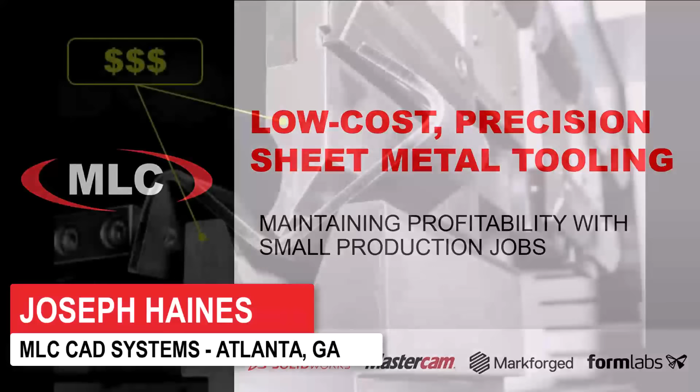In this webinar, we're going to take a look at how low production volume sheet metal bending jobs can actually be profitable. Typically, the largest upfront costs with a sheet metal gig are tooling related.

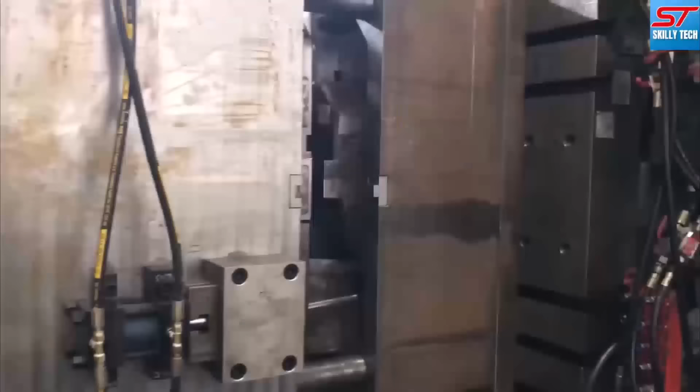I come from the automotive world where tooling costs are very prominent, particularly in metal stamping and injection molding. I bring this up because both automotive and sheet metal industries use the same solution to offset these high tooling costs: making a lot of product.

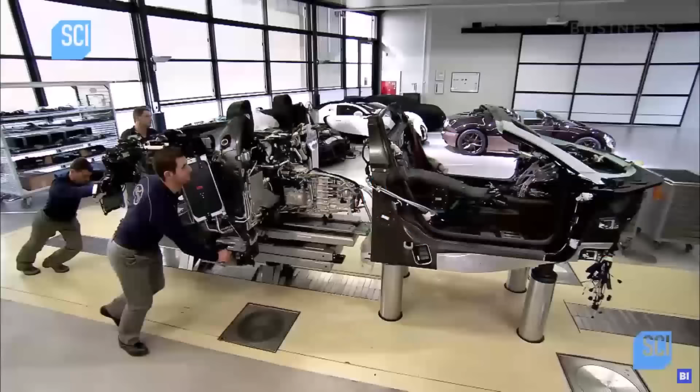That's one of the main reasons why cars like the Lexus LFA and Bugatti Veyron, each of which saw less than 500 units built, are so expensive. While these ultra-high cost performance cars have deep-pocketed buyers willing to fork over the big bucks, the same cannot be said for expensive, small, custom sheet metal orders.

With most customers not willing to pay the high prices, the fate of these jobs usually ends up the same way. But what if they didn't have to?

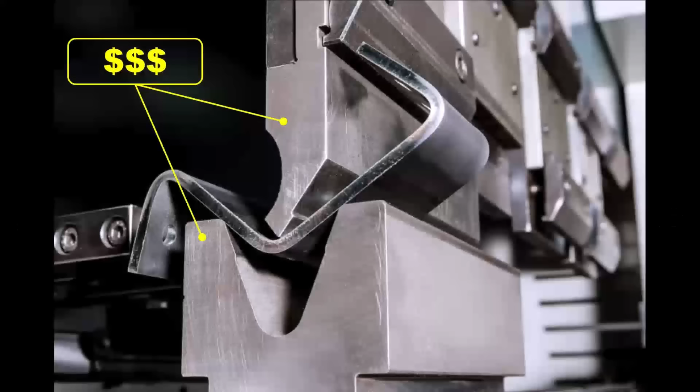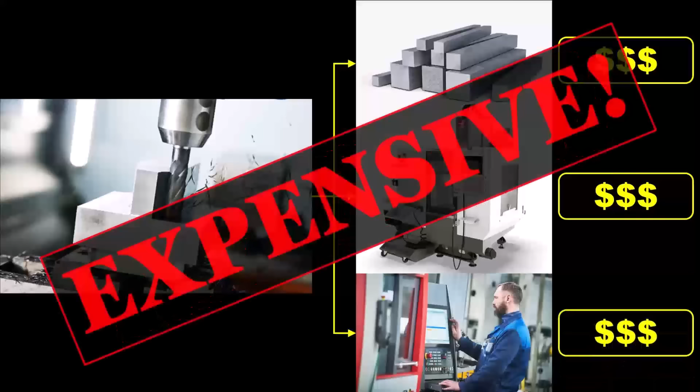Much of the high cost associated with traditionally manufactured sheet metal bending dies is just that - they were made with traditional manufacturing methods. Expensive blocks of steel that have to be milled down with expensive CNC machines operated by expensive, highly skilled machinists is, well, expensive. However, there is an alternative manufacturing method that can easily eliminate all these barriers.

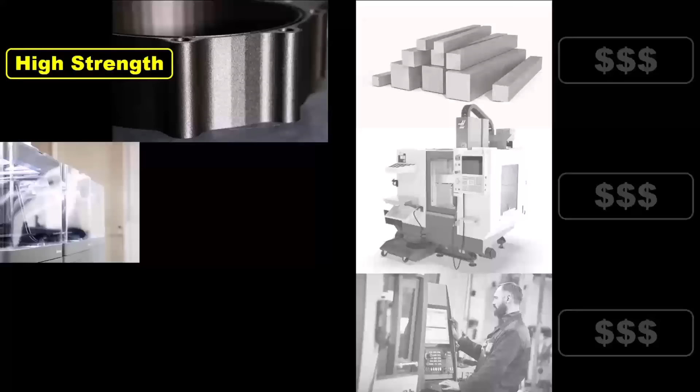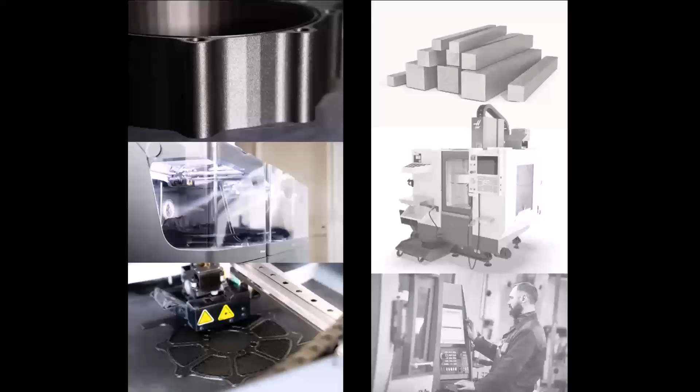It uses strong, low-cost material in a comparatively less expensive setup that is fully automated - no tending to or programming required. And to build on this list of opposites, the name of this technology happens to be an antonym of subtractive manufacturing. Of course, we are talking about additive manufacturing, or 3D printing.

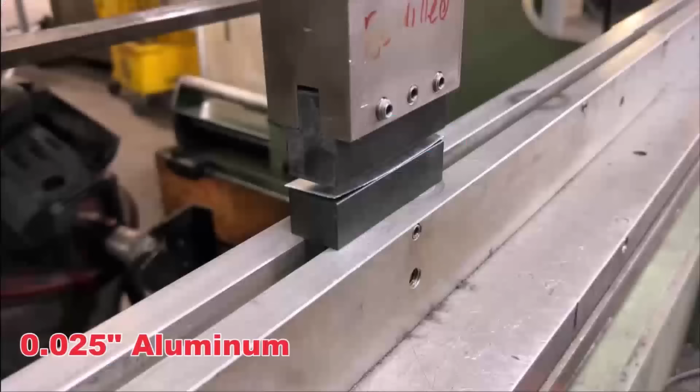That's right, you can actually 3D print sheet metal tooling. In fact, we've done it before with our sheet metal stamping dies. And here, we did it again, only this time focusing on sheet metal bending.

After speaking with Roland, our resident sheet metal expert and one of our top CAD AEs, two types of tooling were settled on: a Z-bending die and a gusset forming die.

To understand why we chose these, it's important to first understand that unlike injection molds or stamping dies, sheet metal bend dies can be used across many different jobs as long as factors like material and gauge are the same or similar. This is easy to do with simple V-block dies, but more complex bends and new or uncommon gauges require custom tooling.

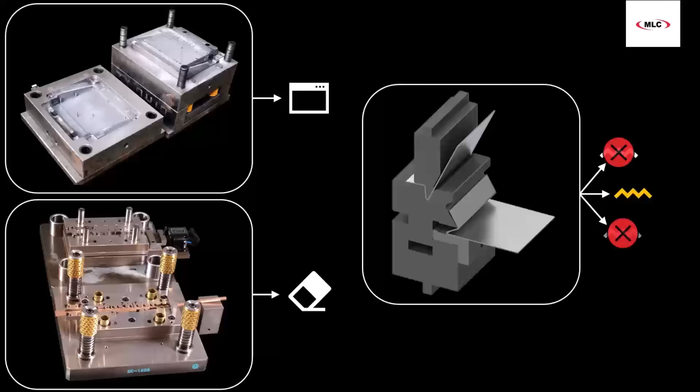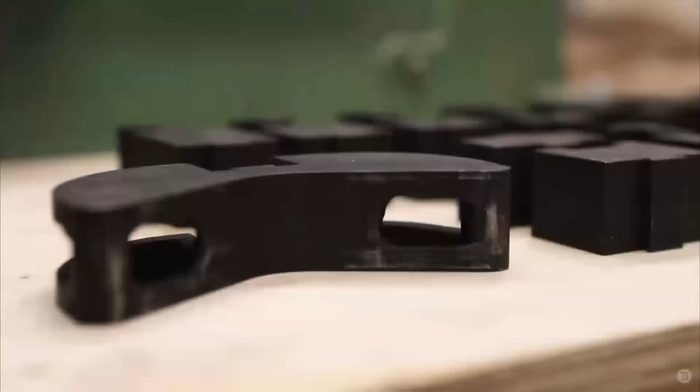When presented with a job that will require new tooling, machine shops will first determine if modifying a pre-existing tool is possible. That way, less cost is incurred by the customer and turnaround time is shorter.

So for these dies, this is just a whole bunch of quarter-inch pieces stacked up and welded together - because if you've ever shopped for this stuff before, it is extremely expensive.

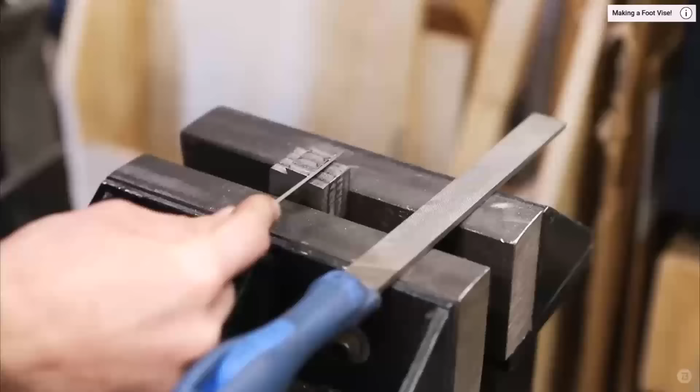However, there are limitations to modifying dies, and that leads us back to the tooling we chose. Z-bending dies have unique geometry that is specifically designed to the size of the Z-bend and gauge of sheet metal. Therefore, there's no room for modification here.

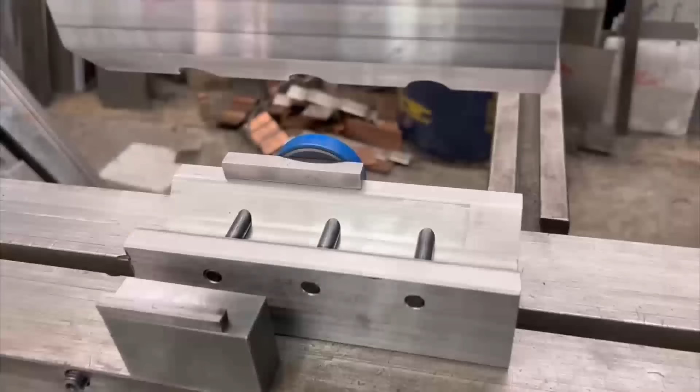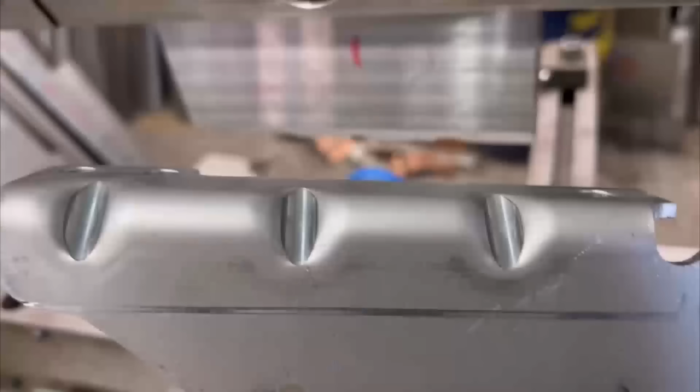Gusset forming dies, on the other hand, are a little more forgiving because they're usually a V-block with drilled-through holes for rod insertion. It's an easy modification, but it means drilling holes into a perfectly good V-block, plus you are now limited to forming gussets of one size. Not much room for modification, as it turns out.

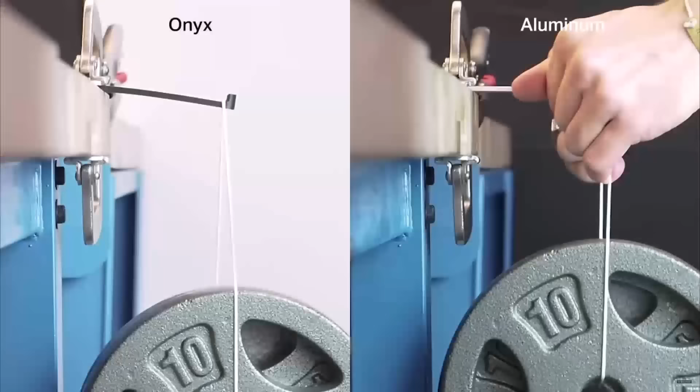But none of these limitations need to exist when you have high-strength composite 3D printing at your disposal. Thanks to Markforged, custom dies can now be made both quickly and inexpensively.

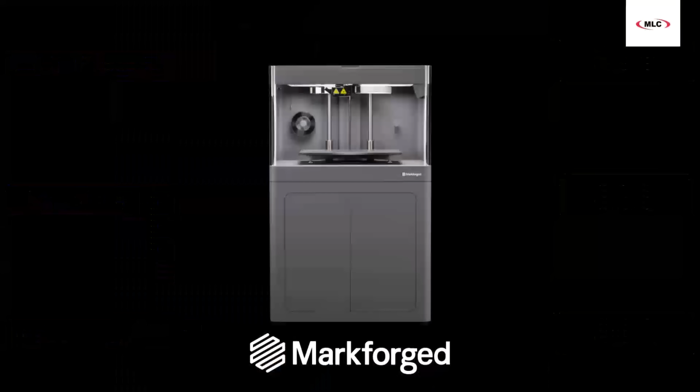Before we get to printing, our dies first had to be modeled, a job accepted by James, MLC veteran and one of our other top CAD AEs. In fact, he went ahead and just modeled up the whole 20-ton press we bought. So yeah, I'm pretty sure he's just flexing his SOLIDWORKS skills at this point.

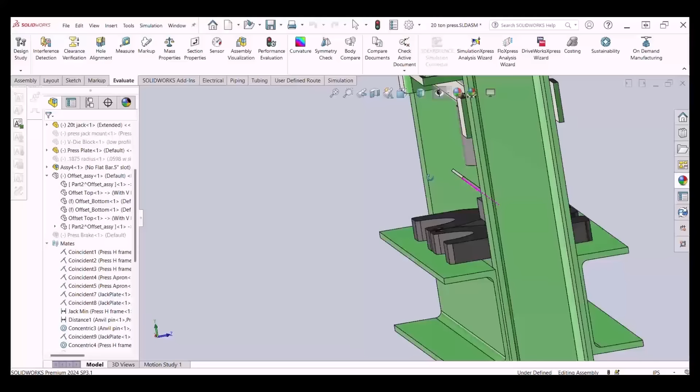But actually, it helped us get an understanding of how tall to make our dies and how to firmly secure the top punch to the post. On that second point, we pulled from a skill set that was the subject of a webinar from last year.

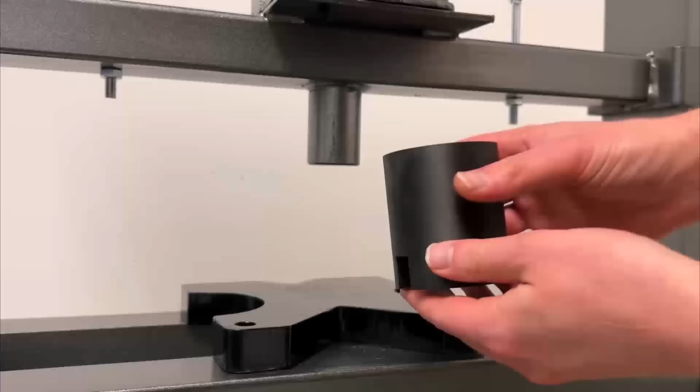3D printing's unique ability to attach anything to anything. James applied this knowledge to model a ring that can slide around the press's post and features notches that engage with the punch. He even made the notch slightly deeper than the post so that the post is the one applying pressure on the die. With this work done, James could begin modeling the dies.

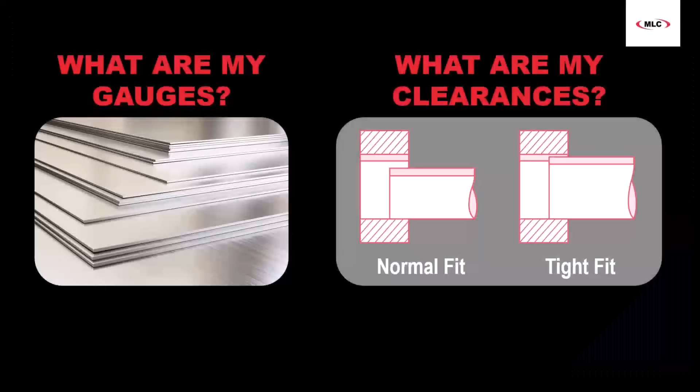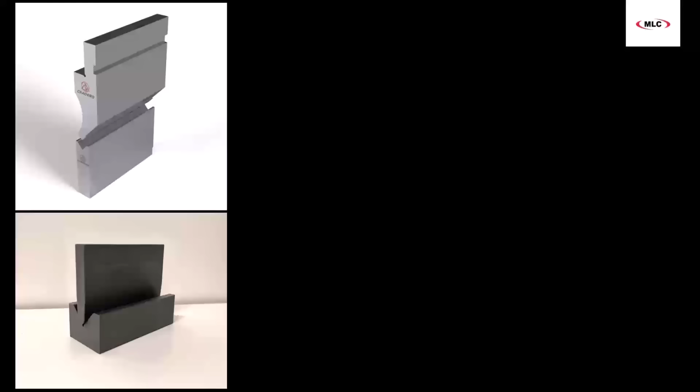The critical bits of information here are knowing the sheet metal gauge and any clearances to take into account between dies and mating components. If that sounds familiar, it's because dies designed for machining or 3D printing undergo essentially the same design process. With FDM 3D printing, clearances are typically 0.1 millimeters for tight fits and 0.2 millimeters for loose fits. As for the sheet metal, our primary gauges were 22 gauge and 16 gauge steel.

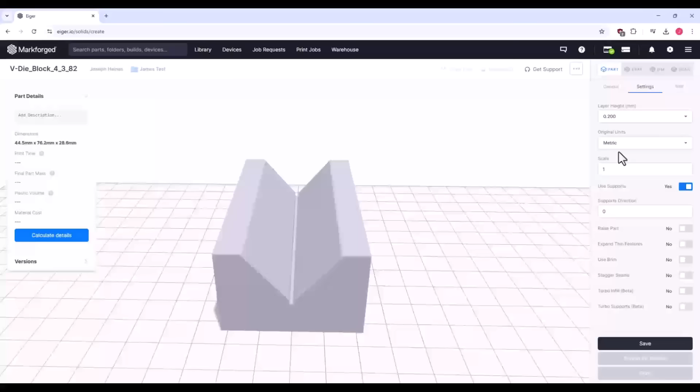Satisfied with the models, we exported the STL files for all the dies and imported them into Eiger, the slicing software for Markforged printers. Markforged printers are perfect for this application because they print with extremely strong thermoplastics capable of being reinforced with continuous fibers like carbon fiber.

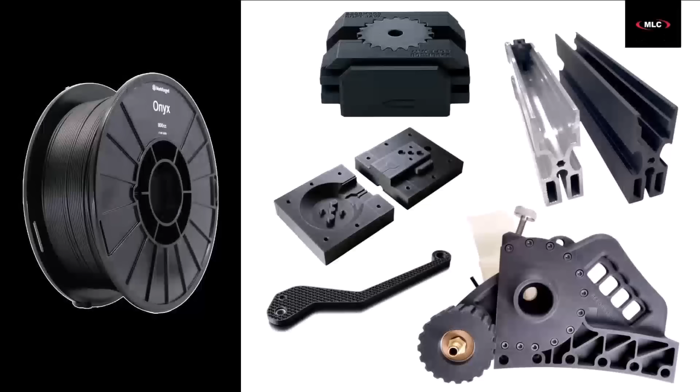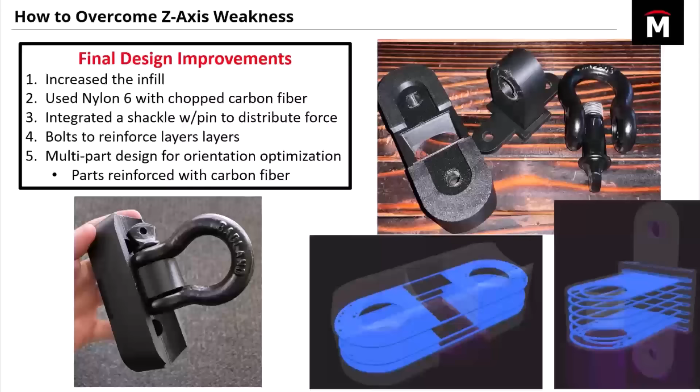Their most common material is called Onyx, a chopped carbon fiber infused nylon that is 1.4 times stiffer than ABS, and is what we used here. If you pair Onyx with continuous carbon fiber, you can actually achieve stiffness equivalent to 6061 aluminum.

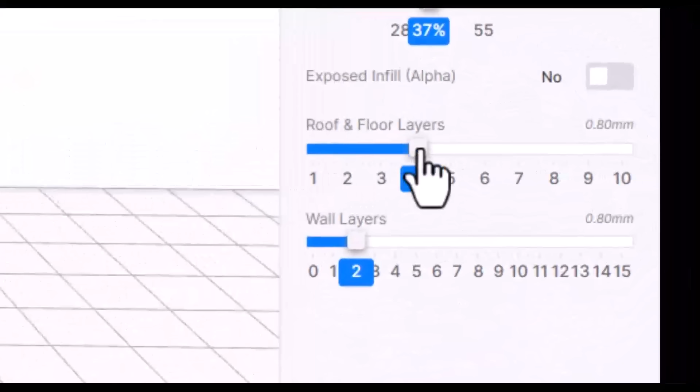It's really strong stuff. But to test the waters, we relied on just Onyx for the first die sets, boosting the strength by doubling or tripling the roof and floor layers and the wall layers. With all this set, it was now time to print.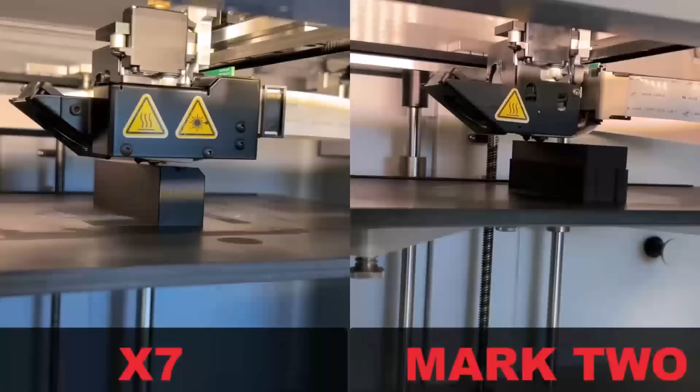Now we have two printers in our office, the Desktop Mark II and Industrial X7. We were able to crank these dies out in no time thanks to printing them on both printers. Everything was looking good on them, so all that was left for us to do now was squash some metal.

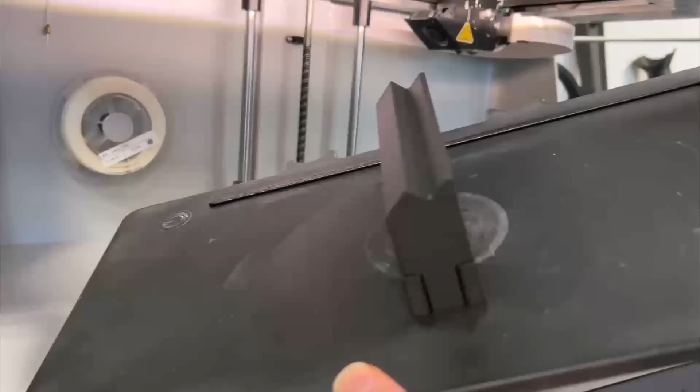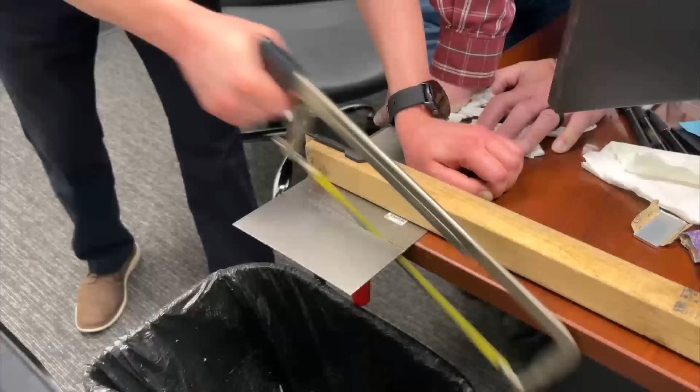Our 22 gauge and 16 gauge pieces were prepared using our tin snips, which was brilliant for the 22 gauge steel, a Dremel, which was okay but mostly just made a ton of noise and sparks, and a hacksaw, which made me pray for the sweet release of death.

Hallelujah! The 22 gauge piece was thrown into the pinless gusset former and bent with the help of our coworker's 6-year-old son. Not trying to one-up anyone here, but if we can bend sheet metal with custom-made 3D printed dies and some child labor, then you can too. Well, minus the child labor part.

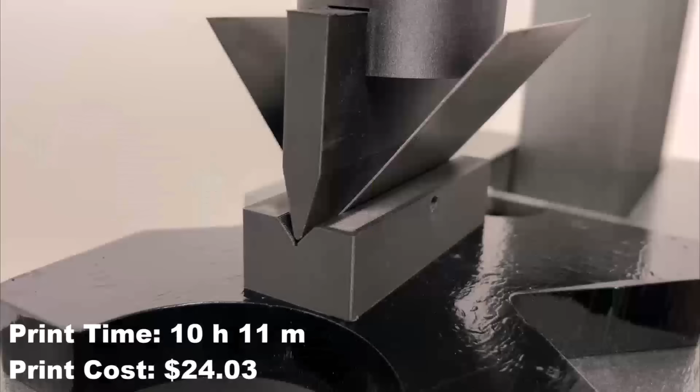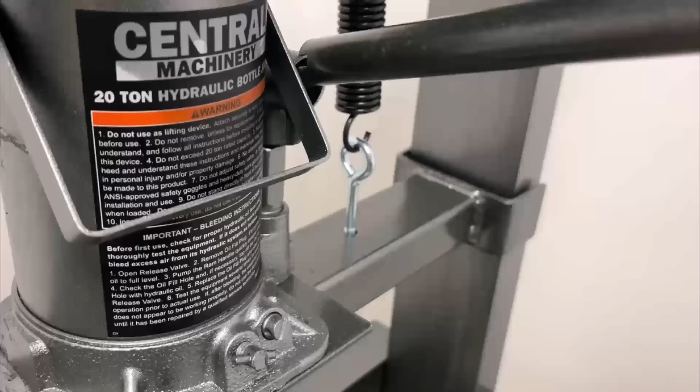Oh, and to retract the bottle jack, you usually use the cranking pole to turn this relief valve, but this is a bit awkward, so James actually modeled and 3D printed this handle to make our lives easier. I'm telling you, 3D printing has so many uses.

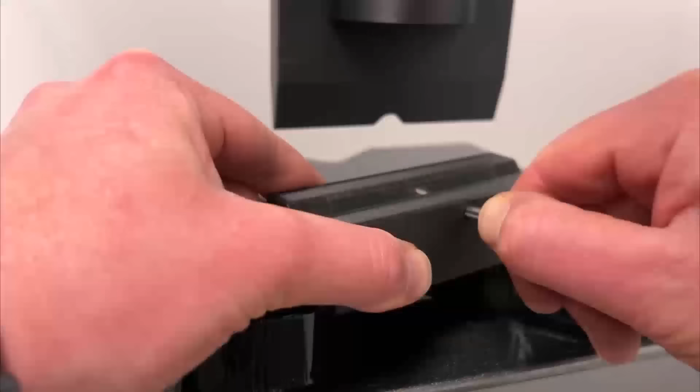Back to the bending, we inserted a 3/16-inch cotter pin and laid down our 16 gauge plate, which is the gauge this die was designed for. It's a little awkward lining the two die halves together and keeping them lined up, so it takes a bit of finesse and patience. But the bending worked well and the gusset looks really clean.

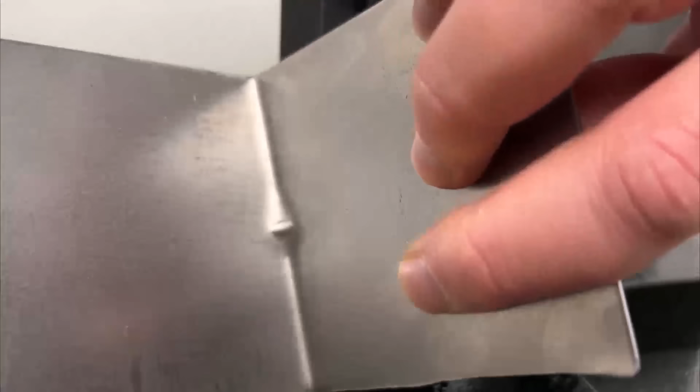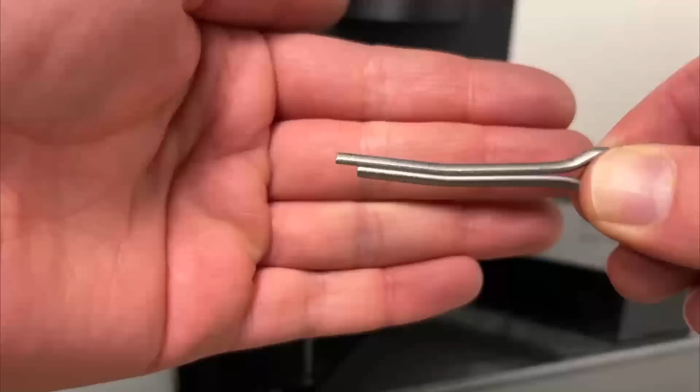And speaking of clean, the bend lines appear parallel when placed against the 90-degree section of I-beam on the press, so that was good to see. Only downside was our cotter pin didn't hold up so well, but you can see here the die wasn't even scratched. We then loaded up some more 22 gauge stock and attached a digital angle reader to the plate.

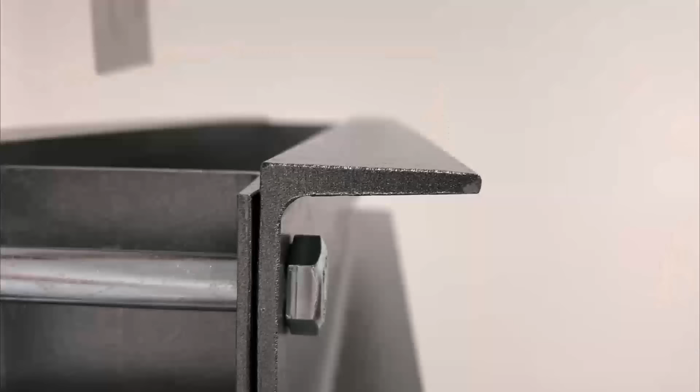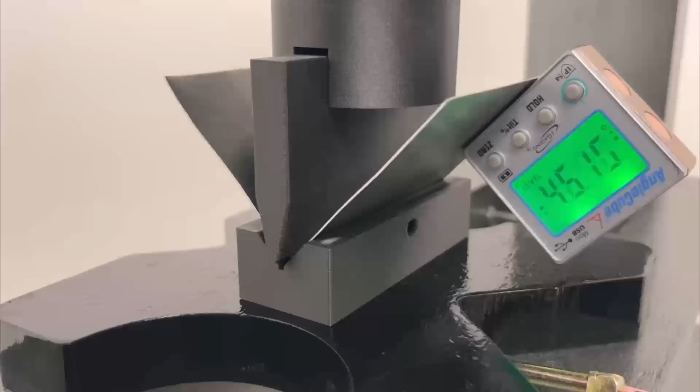We bent it to 45 degrees on one side, 90 degrees in total, and lined it up to our press's I-beam. Thought this was kind of a cool demonstration of spring back. You can see the plate isn't quite parallel. So we threw it back into the die and squeezed it a little north of 47 degrees, or 94 degrees total. Now it's looking much better.

We ran those same numbers on the 16 gauge plate, and you can see that the thicker material doesn't exhibit as much spring back, so we got it a little overbent here.

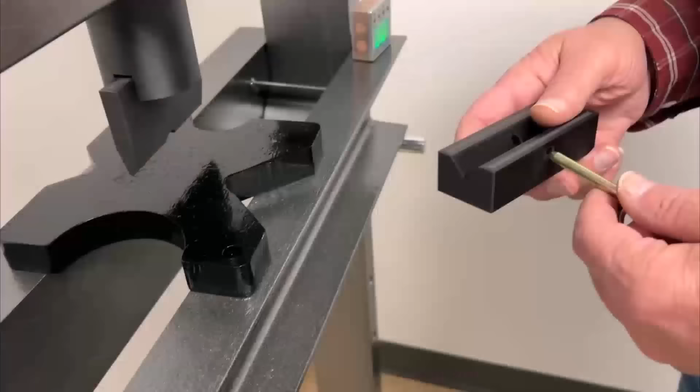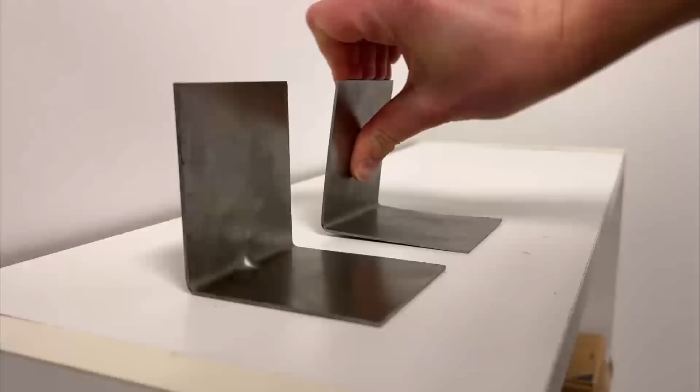Now with our cotter pin toast, James went back and reprinted the V-block to accommodate a 1/4-inch linch pin. We threw in our 16 gauge plate and sent it. The gusset now looks far more pronounced, and you can actually feel the greater stiffness compared to the gussetless plate.

Next, it was time to test the Z-bending dies. We marked our 22 gauge plate with bend lines to make a hat channel and compressed one side. Then we flipped it around and compressed the other side.

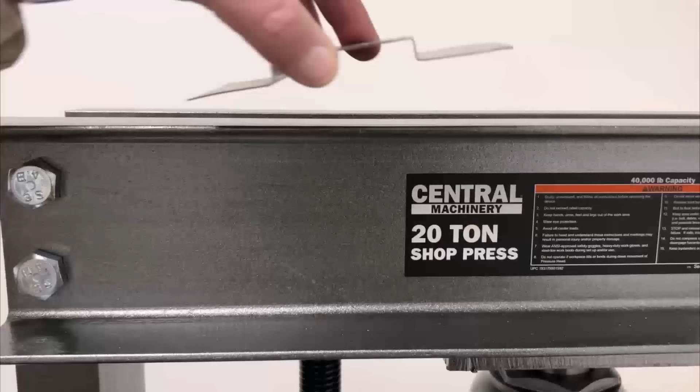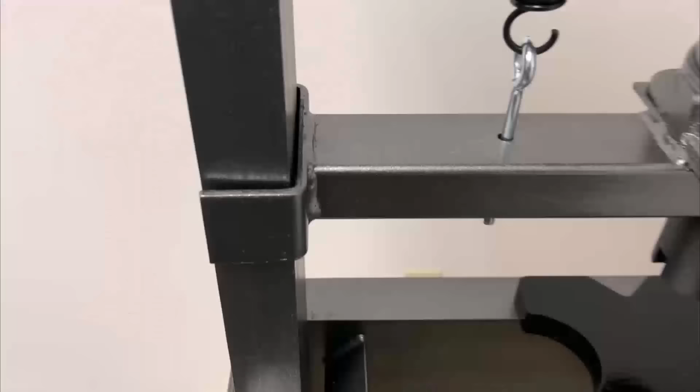The part turned out flat, and the height of the hat channel was within 1/10,000th of an inch between the two ends. Considering we're using a 20-ton shop press with floating upper and lower spans, I'm blown away that we are actually able to achieve this much accuracy.

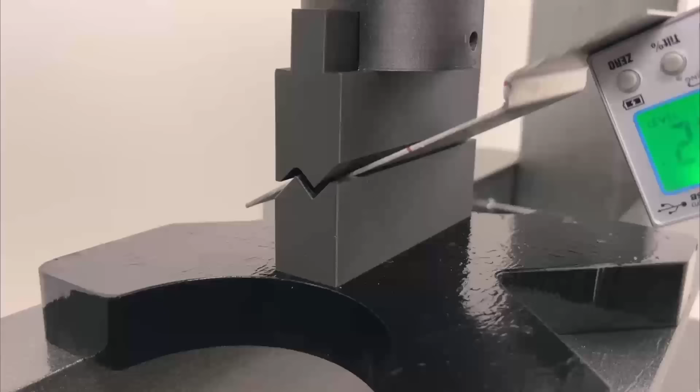Since we had some time, we threw in a 16 gauge section too. We had a bit of rocking on the top die that resulted in some duller bends by comparison, but I think it turned out satisfactory, all things considered. Even after all this tonnage and compression, the Z offset dies are not showing signs of damage.

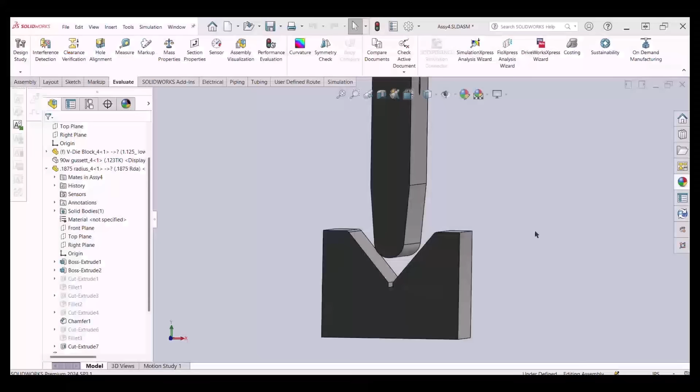Now we were walking down Easy Street at this point and wanted more of a challenge. We saw some 1/8-inch steel flat bar at Home Depot and bought some. James went to town in SOLIDWORKS to configure a new V-block and punch capable of bending this behemoth. The same slicing process you saw earlier was applied here, and the job was sent to the printer.

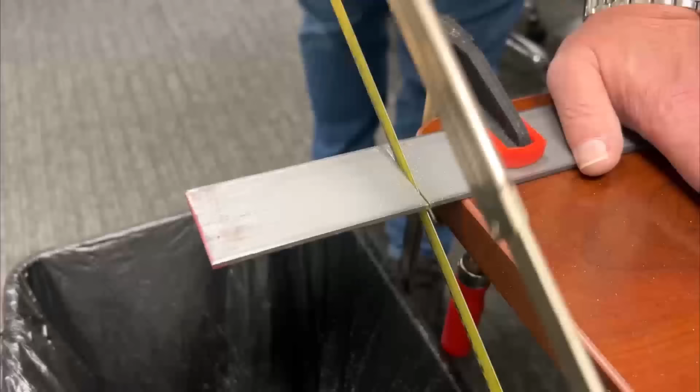Loading the dies into the press, it was time to cut a piece of this thick flat bar and mark the center of the bend. Then we began pressing on it. You'll immediately notice the punch begins to tilt. With more and more pressure, the plate is bending, but the punch's angle is also growing. I wonder what'll happen.

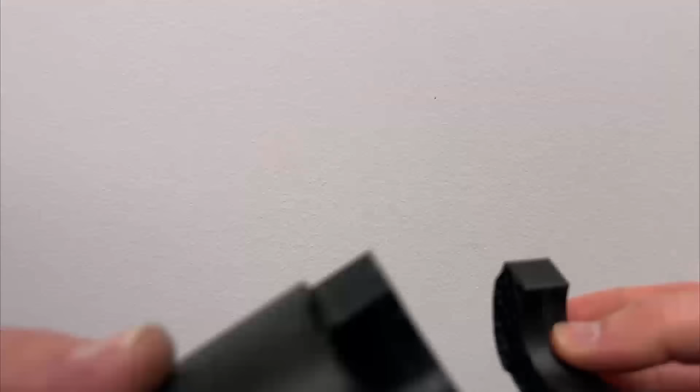Honestly, that scared the shit out of me. The tilted punch was placing so much lateral pressure on our punch adapter ring that it delaminated along the layer lines, sending everything flying into the wall. I'm just glad it took a chunk of sheetrock out of the wall and not out of me or James. The punch and V-block both saw compression damage, so it was time to reset.

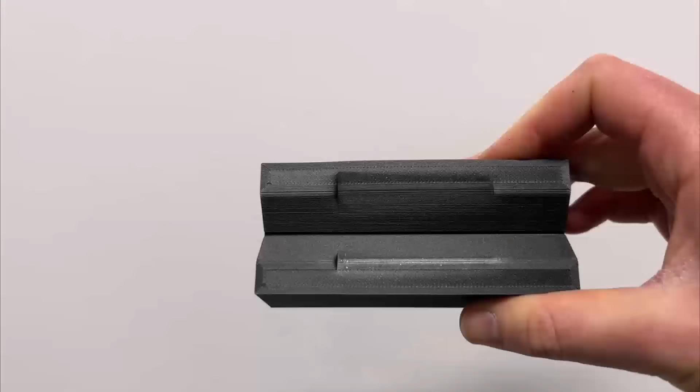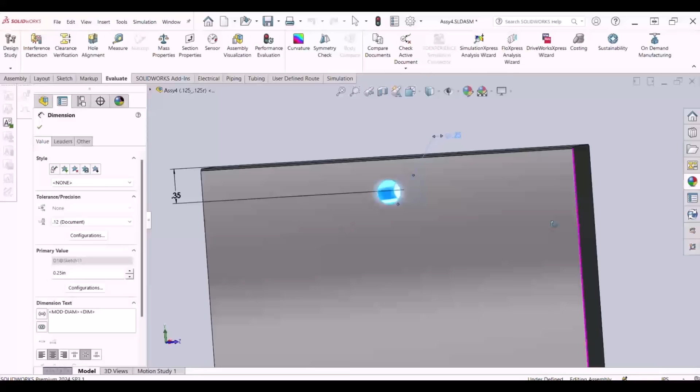James went back into SOLIDWORKS and decreased the angle of the V-block and increased the radius of the punch to reduce the tonnage required to bend the flat bar. It's so easy to just go in and change dimensions in parametric, you gotta love it. Also, a hole was added in both the ring and punch to allow for a 1/4-inch bolt to pass through. This would prevent the rocking we saw on the punch and stiffen the ring to prevent delamination.

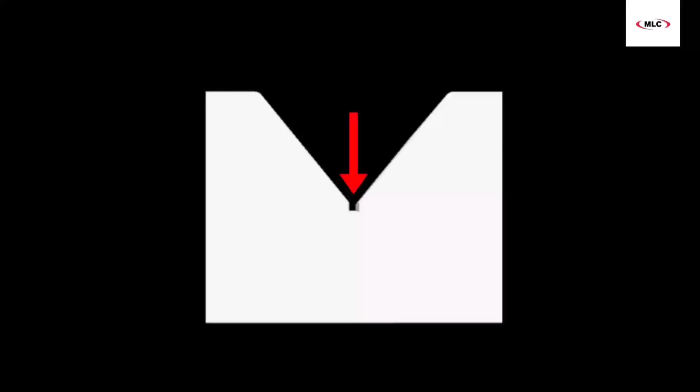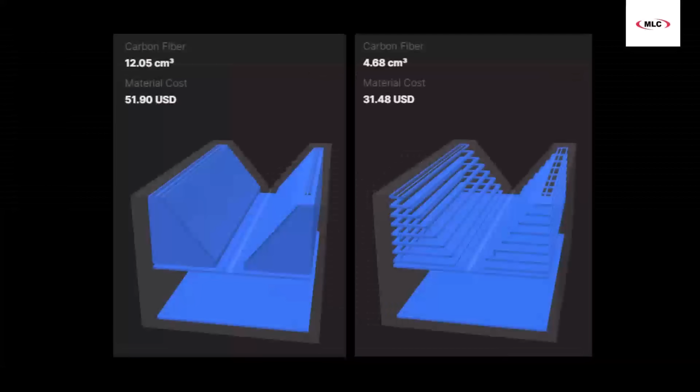We resliced the parts, keeping the punch's parameters the same as previous, but the V-block was updated to include continuous carbon fiber reinforcement. With the V-block, we have both compressive forces and lateral forces, so we used two fiber reinforcement strategies. Isotropic sandwich panels were added just beneath the apex of the V and at the bottom floor to resist the downward compression, while striped concentric fiber rings were added along the V to resist those lateral forces.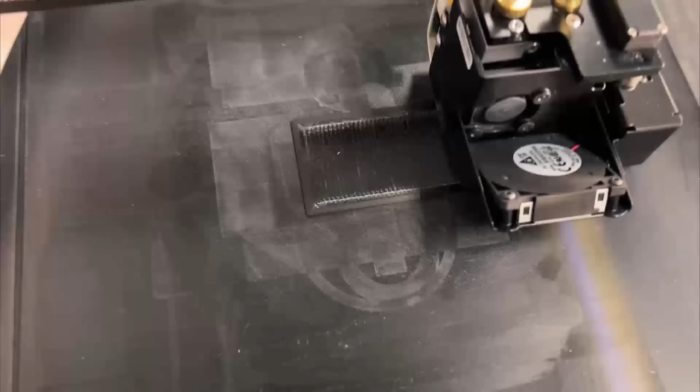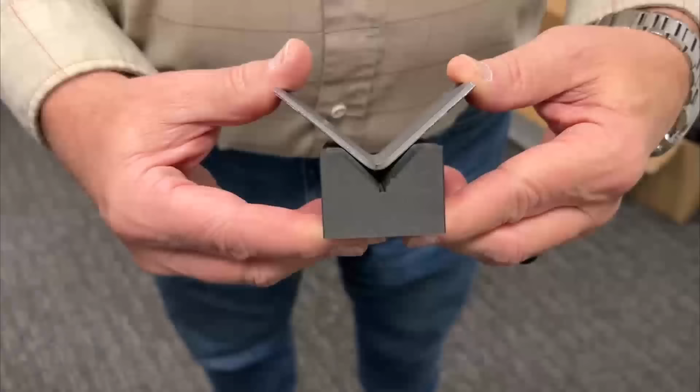We could have added them in one uninterrupted group, but striping is more material efficient without sacrificing much in the way of strength. The parts were then reprinted, and the next day we couldn't wait to come back to test. Now, for the sake of brevity, we didn't show some of our other attempts to bend this 1/8-inch bar, but we had a couple other V-blocks printed to help gradually bend the bar further and further. With each new V-block, James reduced the V's angle, performing what's called air bending in the industry.

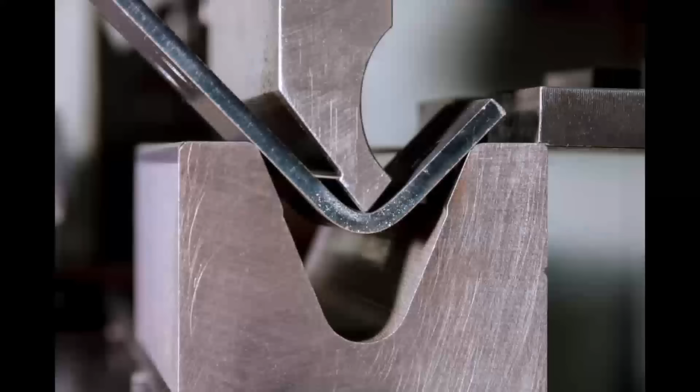Now, of course, as a millennial, only one thing comes to mind when I think of air bending, but the less air we had, the sharper we'd get the bend. And the sharper it became. Eventually, we got to within a few degrees of 90 and decided we gotta get it just perfect.

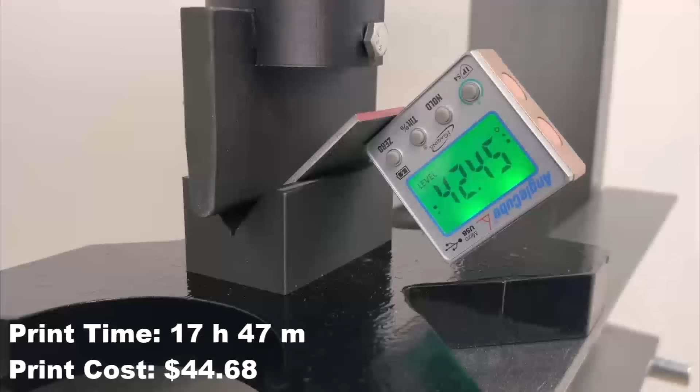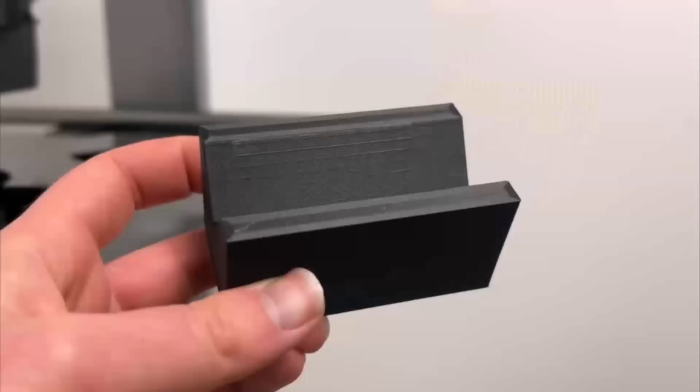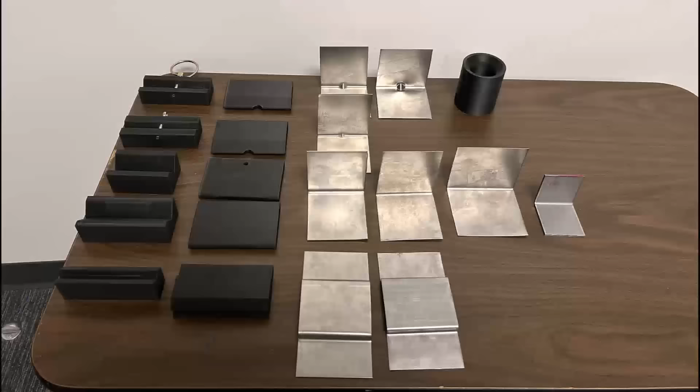The bend lined up with the press's I-beam and is within a degree of 90. So that pretty much covers it. Here are all the dies we made along with all the sheet metal bent.

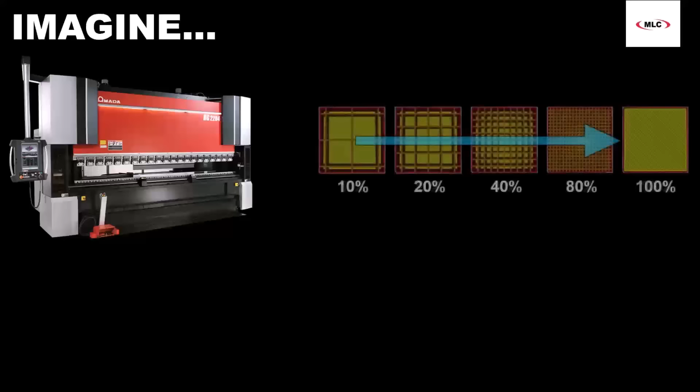To think how quickly we could just drum up a new version, bend some pieces, iterate where needed, and do it at an extremely low cost just boggles the mind, especially when you think about how it compares to traditional methods. And when you think about areas where we may have lacked some success, imagine if we had a proper press brake and we printed our dies solid, or if we increased their thickness, or maybe if we added more fiber. Not only would we be cranking out sheet metal parts left, right, and center, but we might be able to bend up to 1/4-inch plate.

In fact, maybe that'll be the subject of a future video. I keep saying that after each one of these, and a new project always comes up, so I guess we'll just see how far this sheet metal series takes us. But that's all from me, and I appreciate y'all for watching.